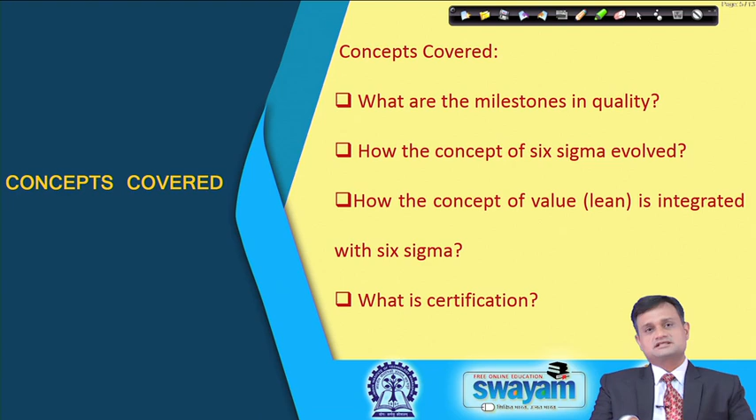Let us first see the history of continuous improvement and the milestones industries have gone through, and today they are able to provide excellent and competitive products to customers. The first initiative in this history, during 1979 and 81, was the quality circle.

Before that, the concern for quality was there, but more formal practices evolved since the 1970s. During 1979, quality circle was the main tool, comprising some 10 or fewer people who meet regularly. They may be from various functions, a cross functional team, and they pick up some small problems, discuss them, and come out with an amicable solution based on their experience.

This strategy was adopted by Japan, and they felt that quality is not only the concern of the inspection department, it should be the concern of each and every function involved, and hence it is only the people who can really discuss their quality problems and deliver the solutions.

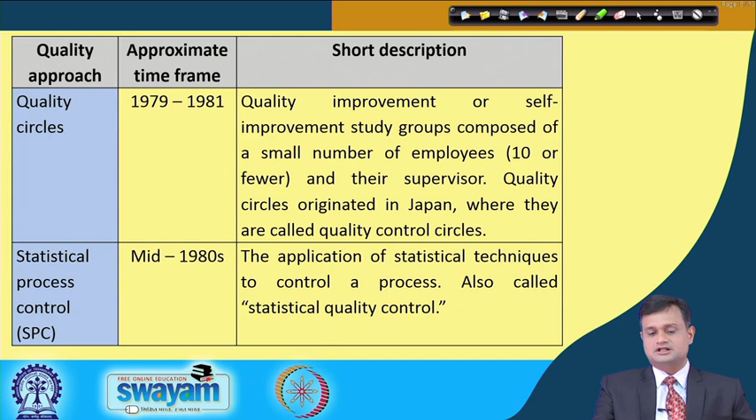Subsequently, people realized that having processes under control is not enough, there is a need for assurance of quality. It means I should be able to meet certain standards, and because I certify for these standards, I should be seen as a potential partner in the supply chain. It should increase my credibility across the world, and I should be recognized as a credible supplier and manufacturer in the value chain. So various initiatives were taken, and the International Organization for Standardization, ISO, helped companies in manufacturing as well as the service sector.

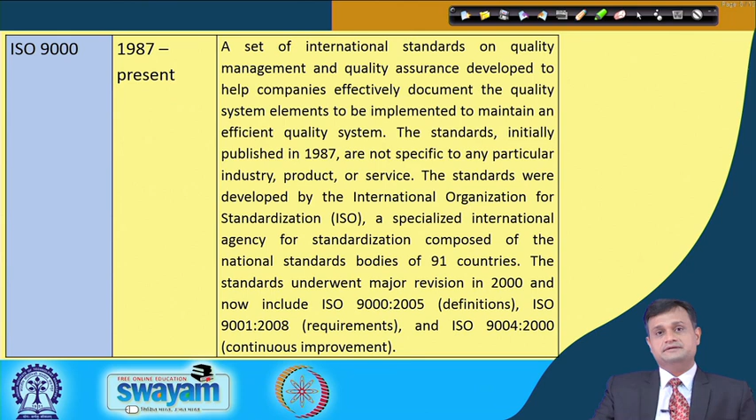They provided broader guidelines, within which the company, the function, and the process owner have to develop the complete process and standards for controlling it. The standards underwent major revision in 2000. Now it includes ISO 9000 to 2005 definitions, 9001 to 2008 requirements, and 9004 to 2000, which focuses more on continuous improvement. This was a very important breakthrough in the journey of quality, which helped companies establish their credibility.

Subsequently, in the time period of 1996 to 97, there was a need for re-engineering, realized by some organizations. They found that their processes and functions, whether administrative or manufacturing, were not aligning with the overall vision, objectives, and mission the company had set as part of their ISO and other quality practices.

So in order to align your system, people, administration and processes, you need to restructure your organization and hence its processes. Also, the adoption of ERP and many other IT tools forced organizations to look for re-engineering, and hence quality improvement was realized through the concept of re-engineering.

Then companies became more and more matured in their quality journey. They started delivering better and better products, and competition intensified, and this intensified competition led organizations to one more domain, and that is benchmarking.

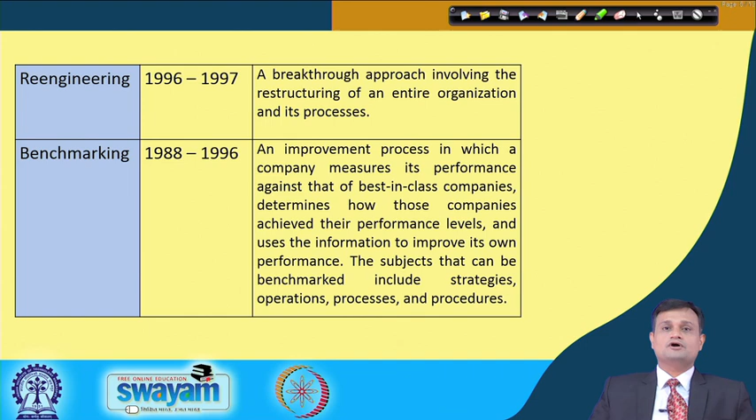Later on we will see benchmarking in detail, but here I would like to say that benchmarking is a process by which I humbly accept that within my industry or another industry there exists a best practice, and if I compare my practices with the best practice, I will get motivation for bridging this gap, and in the process I can improve the quality.

So, this was the time of benchmarking. Subsequently, an article was published in Harvard Business Review on balanced scorecard, and this concept has helped companies indirectly to look at their quality perspective.

Indirectly means this balanced scorecard says that you cannot ensure the sustainability of the organization just by measuring financial performance. You need to also look at your processes, and measure performance in three other dimensions: innovation and learning capability, internal process measurement, and people related issues. If you do not measure these in addition to financial performance, you cannot really realize in what way you should go ahead in the journey of quality.

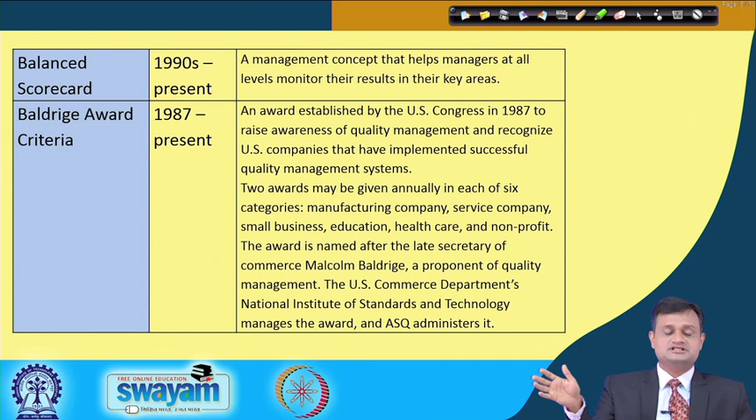Then subsequently there were many awards, but the most prestigious award in quality is the Baldrige Award. Many organizations across the world, including in India, strive for this award. The Malcolm Baldrige evaluation framework checklist was developed, and organizations as a whole, in terms of leadership, processes, people related issues and many other factors, are assessed with respect to this well established checklist, and then awarded this prestigious recognition.

Then the course we are going through is Six Sigma, mainly 1995 onwards. The Six Sigma concept was developed by Motorola, and maybe 7-8 years before it started being implemented, but it has become very popular since 1995, and till today companies, service and manufacturing both, are receiving immense benefits. So if you see

the key of Six Sigma, then it is all about reducing variability. Variation is the enemy, and if you can reduce the variations, you would be producing better products, A grade products, delivering A grade services, and the value of those products and services will obviously be very high.

Subsequently, say 2000 onwards, the lean concept came into picture, and we all know that Toyota has set the benchmark, established excellence through their lean manufacturing practices. Toyota production system is a well known system in the world which has proved that even by adopting some simple principles, you can improve your processes and opt for better quality.

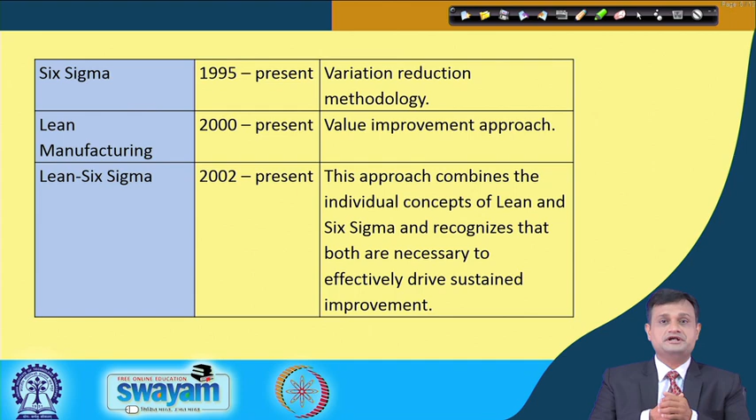Industries also don't want to waste their administrative efforts, and top management does not want to invest in different management philosophies. So lean and Six Sigma as a whole is now seen as a competitive strategy to address quality competitiveness for any service or manufacturing organization.

Now just to summarize, if you see the step by step journey, inspection was the first one. Obviously you will agree that inspection cannot really help. It just helps identify bad product and separate it out either for reject or rework, but the question still remains, why did I produce the bad products? So then the concept came of quality control, then quality assurance, then total quality management, Lean and Six Sigma separately, and then Lean Six Sigma as a whole.

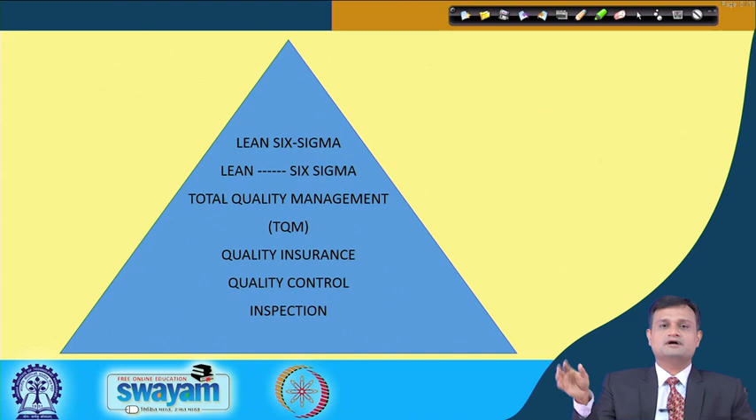Now let us try to appreciate this journey in a different way and see what people were doing in the various phases. So from 1200 to 1799, in one way or other, we had the manufacturing system, we had the factory system, and people were concerned about quality. This was the era of guilds of Medieval Europe. It means you had various trades based on skills, unions, or groups, and strict rules for products and services were followed, and typically in order to track my product and maintain the flow, stamps were used.

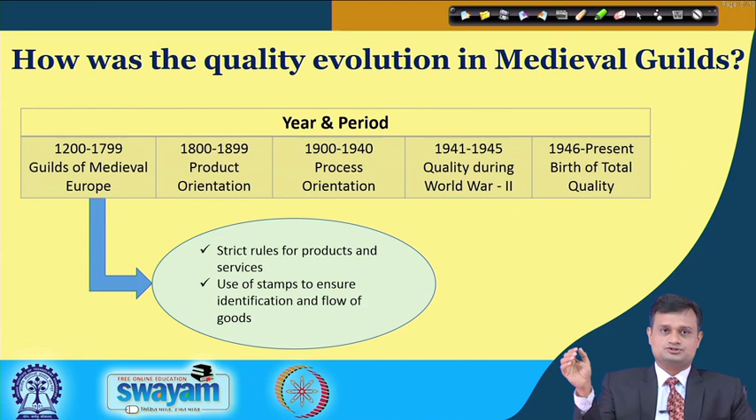Subsequently, 1800 to 1899, the focus changed and we became more concentrated on product orientation. This was the era of the industrial revolution. Trades were divided, as previously it was the trade culture; now trades were divided into special tasks. I want to go by the specific skill required for a particular task. So typically this was the well known era of Taylorism.

The Taylor system was developed for scientific management. Obviously, when you repetitively do a particular work, it gives you the learning effect, and because of this steep learning curve, your productivity and quality both improve. Then there was heavy emphasis on inspection for quality control.

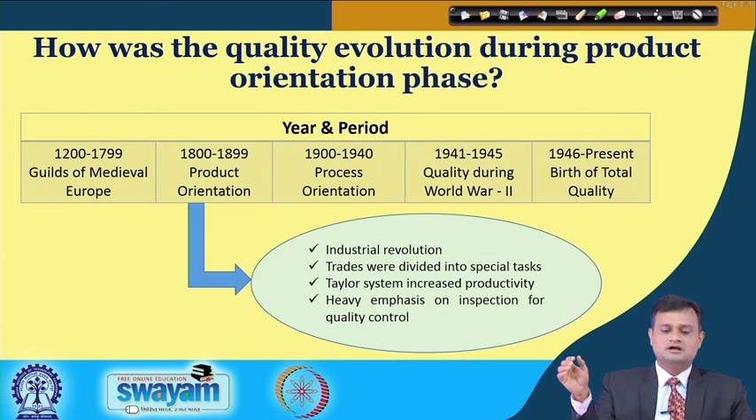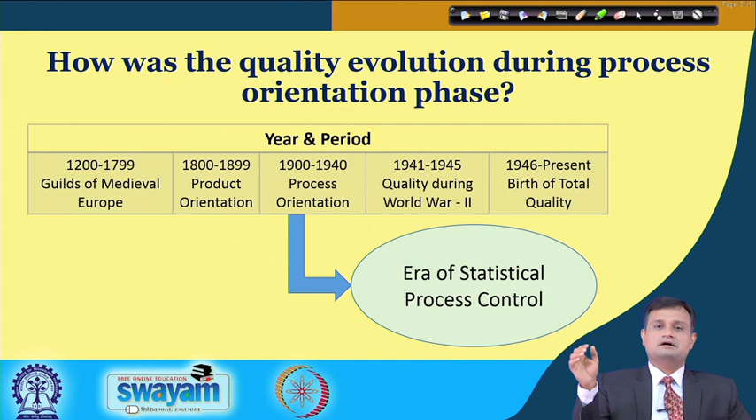Then from 1900 to 1940, we entered into process orientation. From product, we went one step backward. People started thinking, why control at the product level? If I can control my processes which produce either a product or service, a well-controlled process having less variability will definitely deliver better quality products and services. This was an era where statistical process control was the tool, and since then we have always appreciated the use of statistical process control for establishing good control over processes.

Subsequently, during World War II, quality again caught the attention of the defense sector as well as industry, and here quality received another dimension, that is safety. Many military systems were developed for acceptance sampling and other things, so that even working with a sample, you could assure that quality is not much compromised. The defense sector contributed a lot in this era, and quality was strengthened.

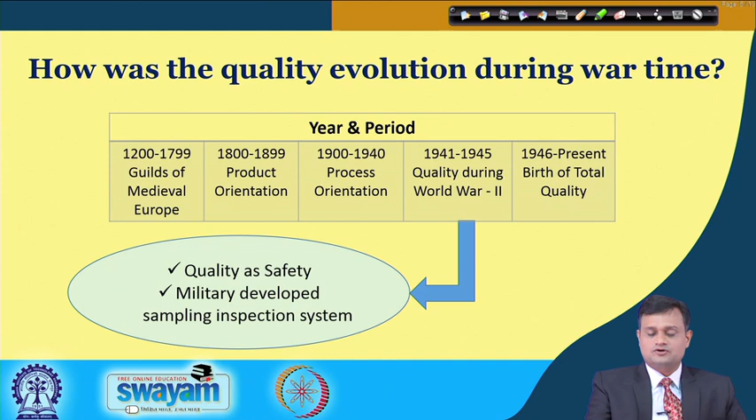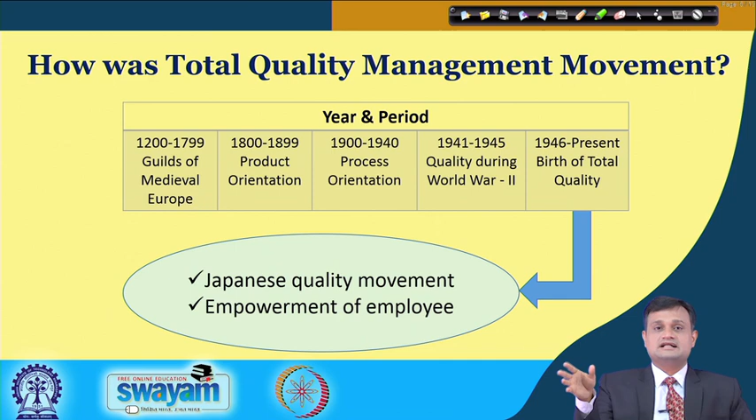Then from 1946 to present, we see this era, where you can put Six Sigma and other things as the era of total quality management as well as Six Sigma. Japanese quality movement and empowerment of employees led to a lot of literature being developed. Companies started considering their people as their asset. They realized that if you don't improve the morale and spirit of the people, they cannot really deliver quality, and unless they internalize the processes and the importance of quality, they can never commit to quality either in administration or manufacturing. Hence, people training, empowerment, motivation, leadership, and many other issues as part of total quality management have become a central focus of the quality journey.

Now if we see the evolution of Six Sigma, which is the central focus of this course, it was developed by Bill Smith at Motorola, a quality manager, led by Mikel Harry, and implementation began at Motorola in 1987. This strategy, focused on DMAIC—define, measure, analyze, improve and control—helped Motorola win the first Baldrige Award in 1988.

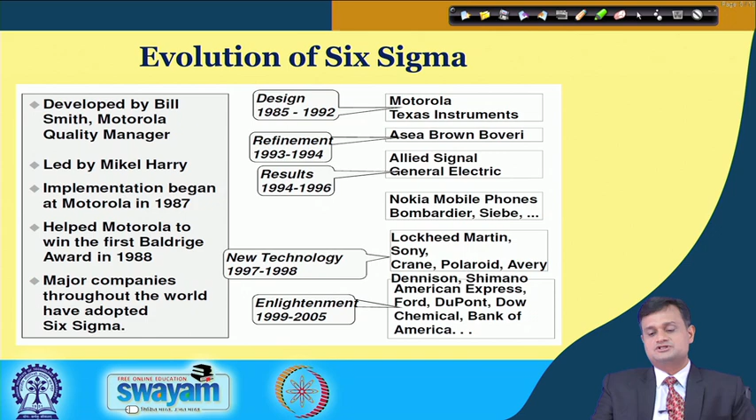Then many companies throughout the world adopted Six Sigma and realized the immense benefits. I have presented the timeline: 1985 to 1992 at Motorola, then some refinements at Asea Brown Boveri, and then Allied Signal, General Electric, Nokia mobile phones, and Bombardier, Siebe, and subsequently Lockheed Martin, Sony, and many other well-known organizations, and then Ford, DuPont, Dow Chemical, Bank of America—they all realized the significant benefits of this Six Sigma approach.

If we look at how Six Sigma originated at Motorola, Motorola was facing a serious competitive challenge from Japanese pagers in the late 1970s. Usually it is said that unless you realize a need, you don't discover a solution. That was the time for Motorola to really think critically and investigate how they could survive and compete. Motorola lost substantial market share and made huge losses. Motorola's quality had not deteriorated compared to earlier, but the competition was offering much better products.

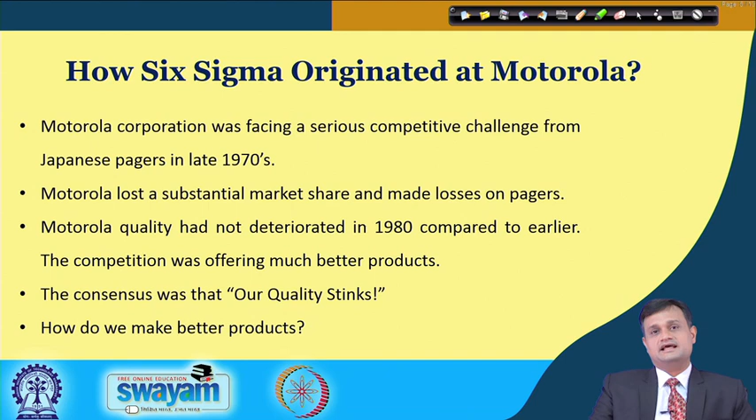So the consensus was that our quality stinks. Motorola introspected and accepted that yes, we have a quality problem. Then the question came: how do we make a better product, a grade-A product, a competitive product which can satisfy the customer in terms of quality at a lesser price?

They realized that the variation—you can see the shape, this is typically a bell shape, normal distribution, and we will see this shape again and again and discuss many issues specific to variability—but variability is the enemy.

Now please understand that I cannot convert these into one line. For example, can I really put a line here and reduce or eliminate all the variability? No, that is absolutely not possible. You cannot have the product exactly produced at the target, or service, but it is quite possible to center my process by reducing the variability. Reducing variability means I would be producing a better product, grade A product, which will receive higher value.

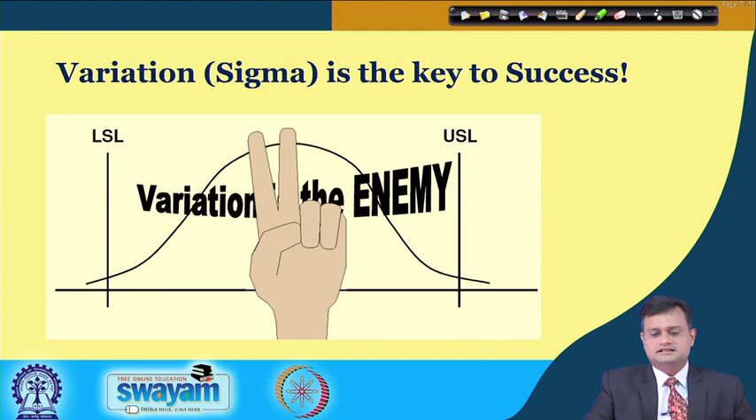So if we see further, we achieve victory over variation by controlling the processes at Six Sigma level. I would like to remind you that Six Sigma is a journey, a philosophy, a set of tools and techniques which helps you improve your quality. Six Sigma is not just like a wrapper that you put on a chocolate so it has a great taste—that is not possible. What is possible is to understand that a particular process in your organization is at what sigma level, and there is a procedure we will see to find that out.

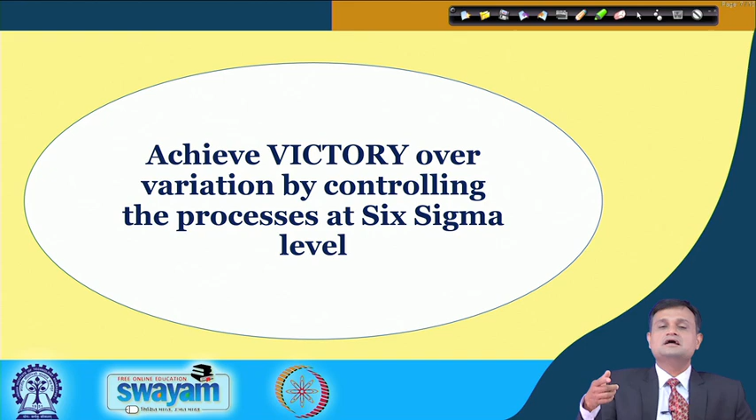Once you figure out that your process is at 2 sigma level, you need to set a systematic cycle of DMAIC to achieve a reasonable improvement from maybe 2 sigma to 3 or 3.5 sigma in the next 6 months or 1 year. Once you achieve that, set a new reasonable target, operate the DMAIC cycle again, address new issues, and this will help you keep going till you reach Six Sigma. So typically, Six Sigma and Lean can give you the best integration and synergy.

Let us see how this synergy is possible. So whether we need Six Sigma or Lean, I need not answer - both are necessary, and synergy is the best.

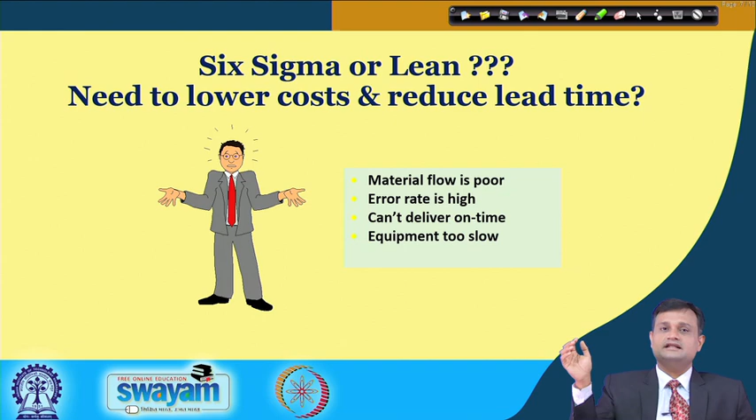There are various indications: my material flow is poor, error rate is very high, my people are struggling with quality, there are a lot of customer complaints, equipment is too slow. When you are faced with all such issues, you need to think and introspect on how to take advantage of Lean and Six Sigma in an integrated way to improve your quality dimensions.

Lean manufacturing reduces lead time by eliminating waste in the value stream, provides the game plan and plays. It empowers people with specific tasks, makes them responsible, enhances morale, and takes their commitment.

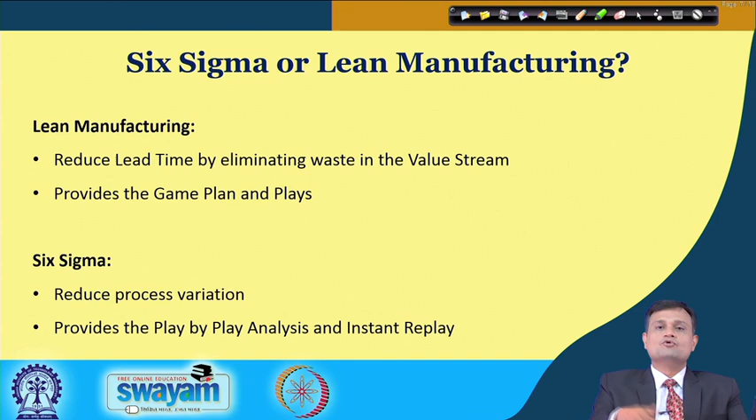Six Sigma reduces process variation and provides the play-by-play analysis, instant replay, so you can keep repeating the DMAIC cycle and move your process from the present sigma to the next sigma. Six Sigma or Lean manufacturing is flow focused.

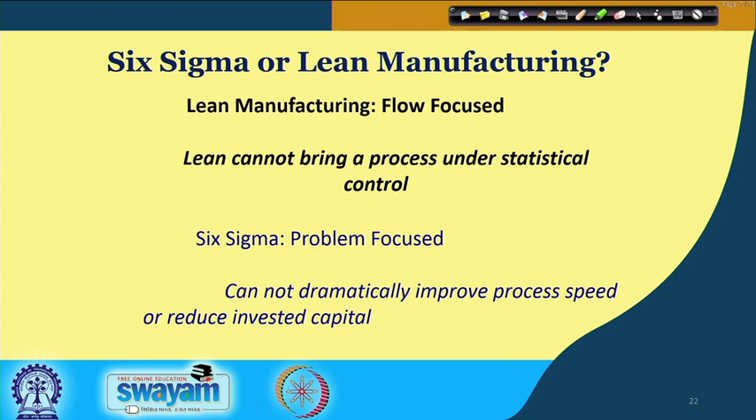Lean cannot bring a process under statistical control - that emphasis is not there. Japanese organizations in that era were not very much impressed by statistical quality control. Mainly US organizations were going by their statistical quality control, while Japanese organizations were more focused on the Lean part. But both approaches are extremely useful.

So in summary, I can say we need both.

I just put the summary to compare Lean and Six Sigma. In Lean, typically we talk about 8 wastes - initially it was 7: inventory, overproduction, correction, inspection, rework, material movement, waiting, motion, non-value added processing, and underutilized people.

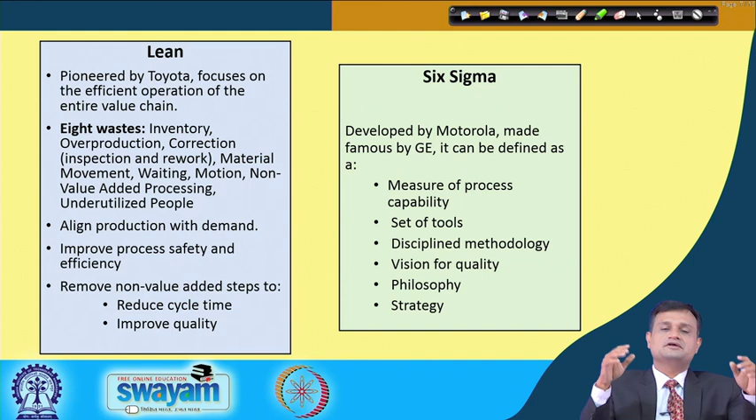Six Sigma mainly focuses on reducing process variability. So it's a combination of two powerful techniques, and we try to leverage the capability of some Lean tools like 5S, value stream mapping, Andon, Pokayoke, and many other approaches, as well as statistical quality control, in Lean Six Sigma.

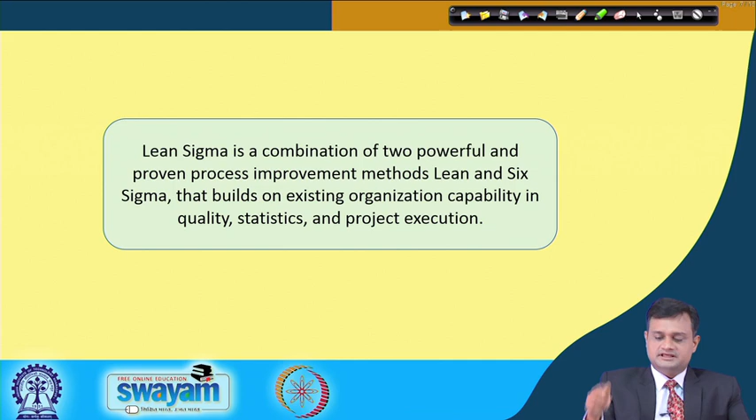Integrating Six Sigma with Lean leads to a lot of competitive advantage in terms of customer satisfaction and profitability improvement. Historical integration problems can be resolved, and a different system model is required.

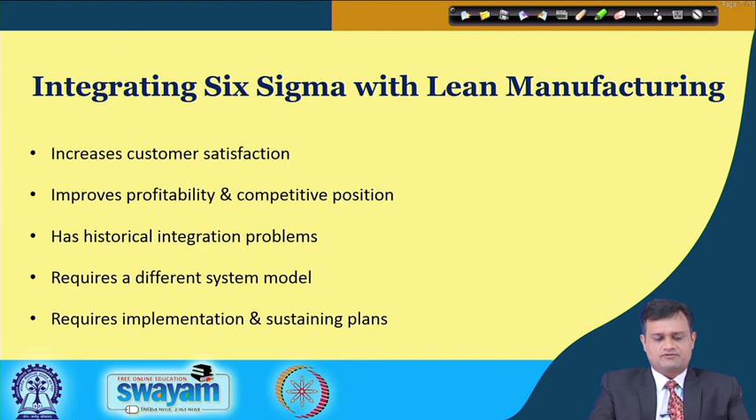Finally, if I summarize this lecture, what are the key advantages of continuous improvement? We say continuous improvement is a journey. I can never say that I have reached the peak and achieved everything in my life. Same way, an organization cannot say that they are the best in the industry and it will remain forever.

Always remember, there is a concept called quality winner and quality qualifier. Suppose you consider your present quality and competitive price as your quality winner today - this will become your qualifier tomorrow. So any quality winner becomes a quality qualifier tomorrow, and hence a company must put their people, processes, systems, and administration into continuous improvement - this is the only way to sustain and move ahead in your journey.

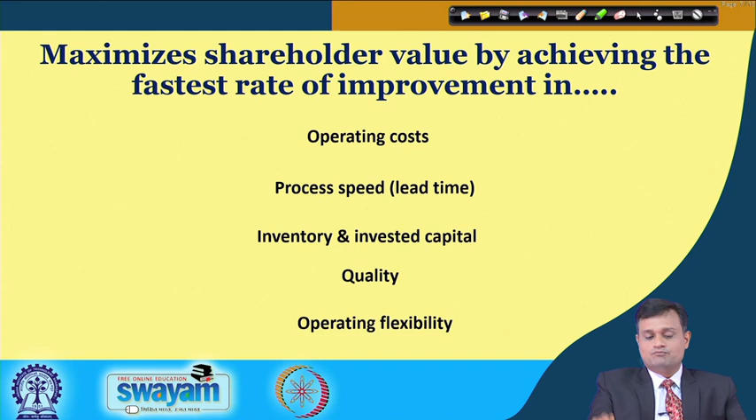Now I would like to end the lecture with a couple of interesting questions. You can think, do brainstorming with your friends and colleagues in the industry, and try to internalize the concepts we have covered in this particular session.

First, what are the important milestones in the evolution of continuous improvement? How do you evaluate the key complexities associated with each of the milestones? How do you see the milestones as well as associated complexity in terms of people and processes? Why are Lean and Six Sigma both important? How can an organization derive synergy by implementing both concepts? And finally, how should an organization plan its continuous improvement journey since its beginning?

Day one, you must plan your continuous improvement journey. Please understand, you cannot achieve everything in one day, but there is a saying that a journey of 1,000 miles begins with a single step, and that is where your continuous improvement journey has a role to play.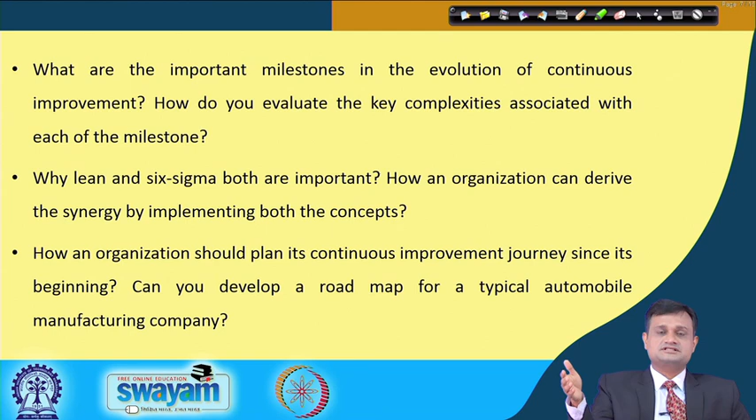Now can you develop a roadmap for a typical automobile manufacturing company? Do the brainstorming, read about the characteristics of an automobile company, go through a couple of cases, and think - if you want to open an automobile company, what kind of roadmap will you set in terms of milestones and quality initiatives that can help the company become an internationally recognized organization.